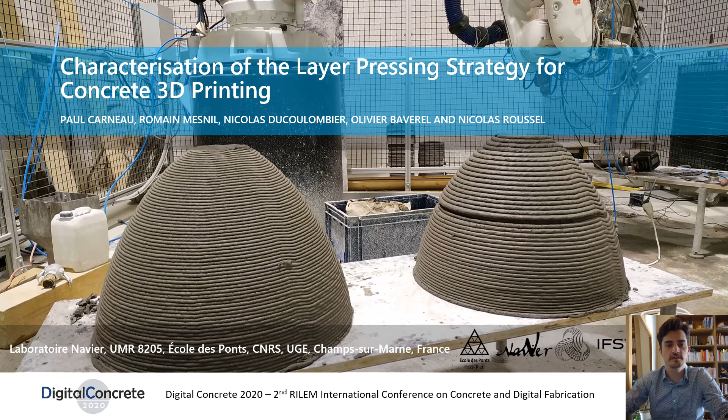I'm going to talk about the characterization of the layer pressing strategy for concrete 3D printing. This research is part of my PhD on concrete 3D printing of cantilevers and form finding of printable geometries in general, for which I'm supervised by Olivier Baverel, Nicolas Roussel and Romain Mesnil.

All the experiments are done in our 3D printing cell with a 6-axis robotic arm equipped with an extrusion head developed by XtreeE, and controlled with HAL robotic software, our industrial partners.

I started my PhD by comparing 3D printing and masonry structures in order to see if we can get insight on how to build cantilevers in additive manufacturing following ancestral masonry techniques.

One main result of this work was that to ensure a successful print, we have to look at the stability of the printed object at three different scales: the scale of the final structure, the scale of the temporary structure being printed, and a local scale corresponding to what's happening at the extrusion nozzle of a single layer.

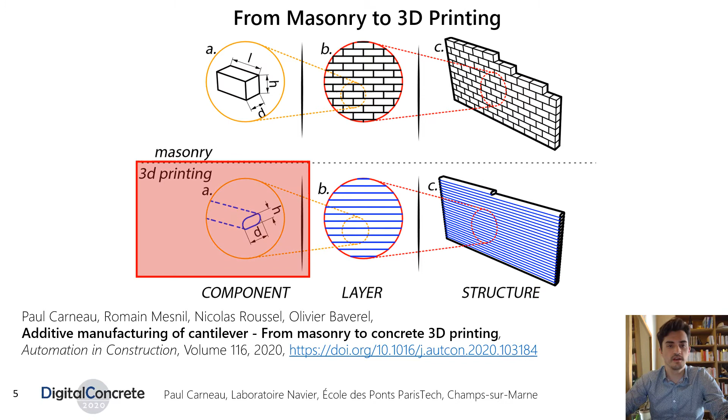This last scale is the subject of this presentation.

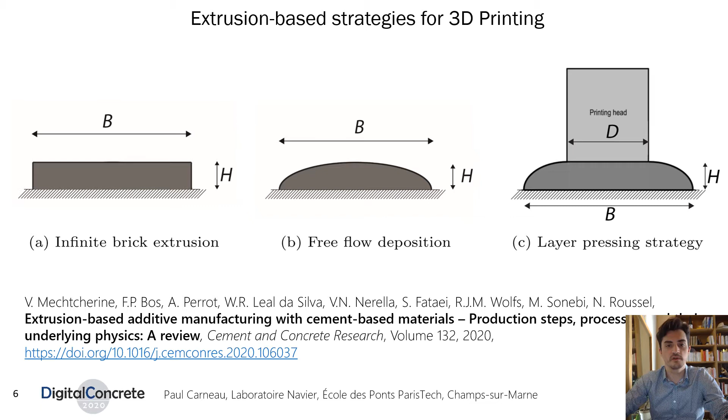Different extrusion-based strategies for additive manufacturing are used within the community today. We are interested here in the layer pressing strategy, illustrated on the right, where the extruded material has a low initial yield stress that allows us to shape the layer's cross-section on the go.

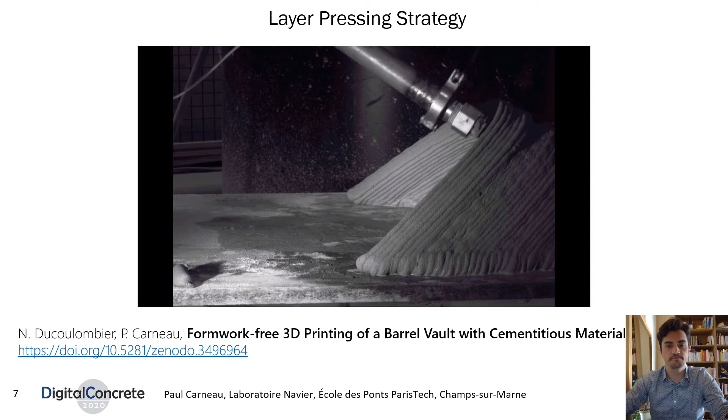We can indeed modify the geometry of the cross-section of the layer independently from the nozzle diameter and always keep a good control over the layer position. This allows us, for instance, to print with variable inclination, as you can see on this example of a barrel vault 3D printed without temporary supports.

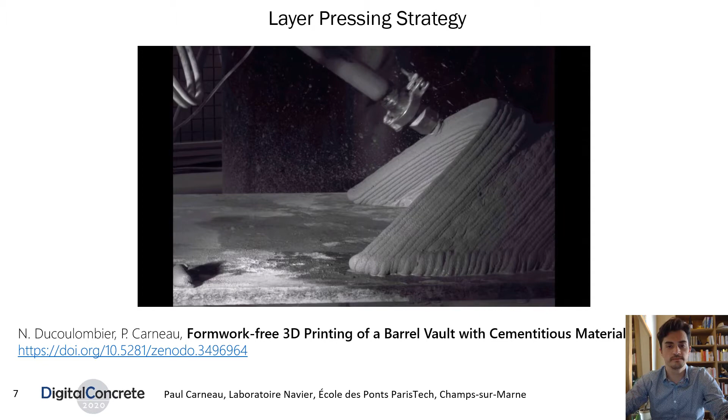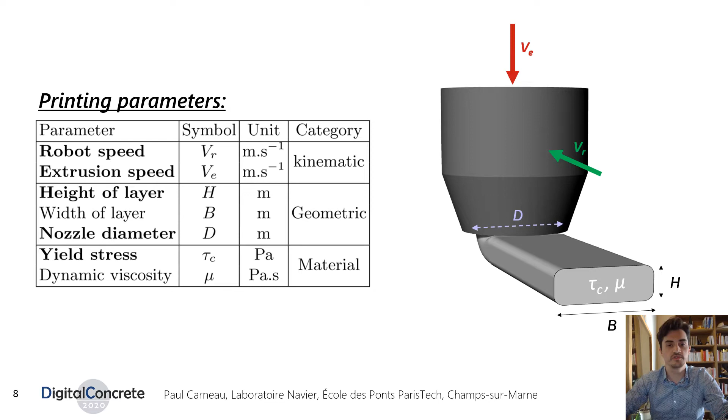So to start, let me introduce you to the printing parameters involved during the extrusion. We have the printing velocity VR, or the speed at which the nozzle is moving, the extrusion speed VE, at which the material is extruded, the nozzle diameter D, and the layer's cross-section geometry defined by its width B and thickness H.

Those parameters are related by the following expression of mass conservation. In the layer pressing strategy, H is given by the position of the nozzle, and the width B is a result of the imposed velocities. Whereas in the infinite brick extrusion, the layer geometry is directly given by the shape of the nozzle, and in the case of free flow deposition, the layer geometry is a result of the competition between gravity and the material yield stress.

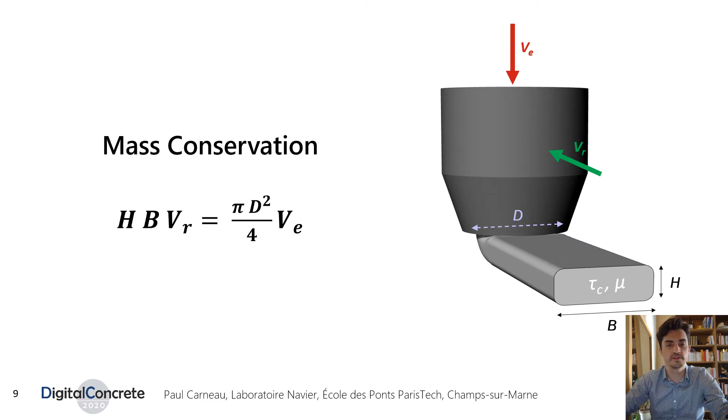With this relation in mind, we first performed a parametric study in order to understand the range of admissible parameters that we can use for the extrusion. We printed multiple square towers of 10 layers each, with variable thickness, printing speed, extrusion flow rate, and length of the object.

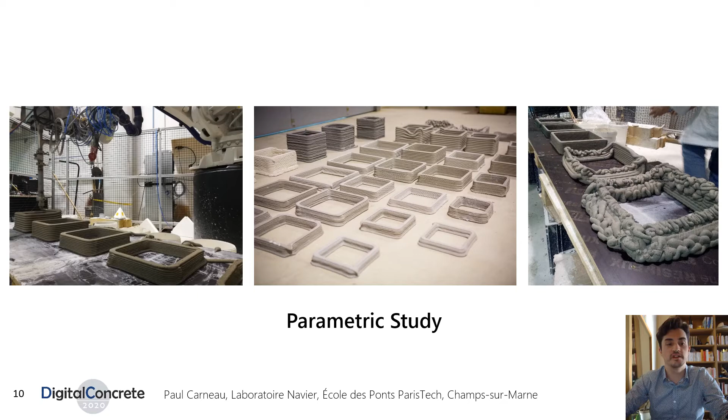That allowed us to identify different printing regimes. The first one is the ideal regime, where we have a perfect control over both the width B and the height H of all the layers.

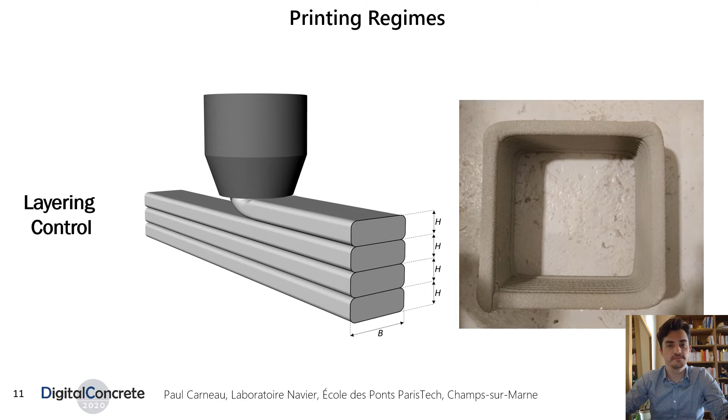For high printing velocities, we started to observe some longitudinal tearing of the layers. This failure mode can be related to the ratio between the printing velocity and the extrusion flow rate, which creates the longitudinal strains leading to the tearing. We identified this regime but haven't studied it in detail so far, and it is not in the scope of this presentation.

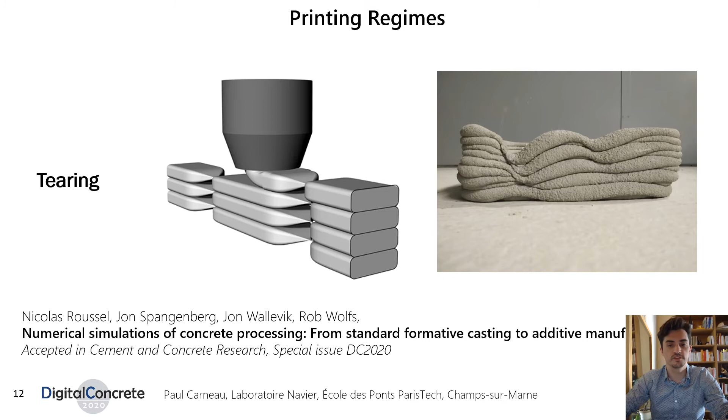The third regime is well known and corresponds to the case where the thickness of the layer is too high for the material to withstand its own weight. The layer flows on itself, leading to accumulated error on both height and width of the entire structure, leading eventually to its collapse.

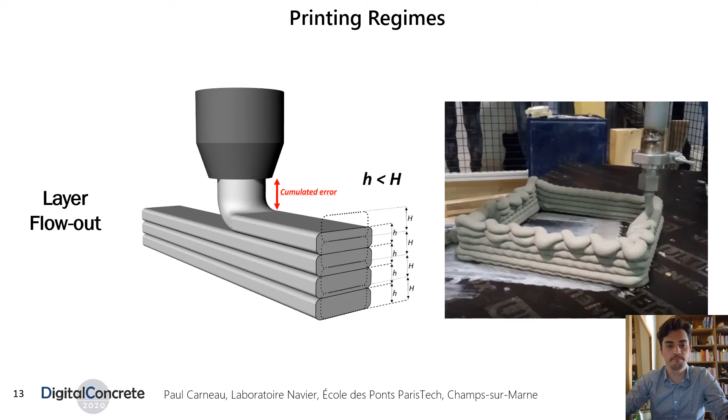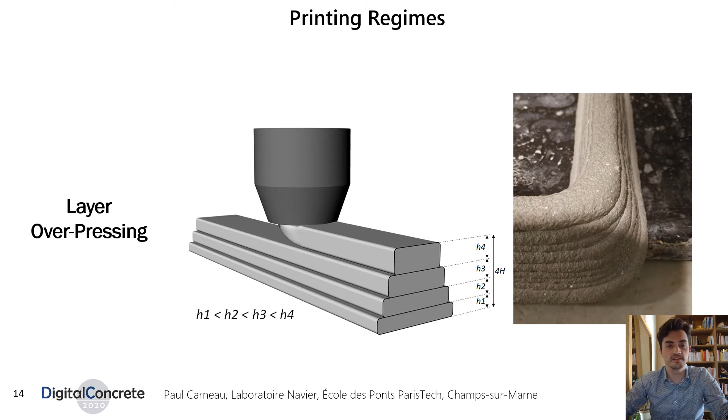Finally, the last regime, appearing for small layer thicknesses, corresponds to an overpressing of the sublayers by the extruded material. When a nozzle passes above all the layers, they are deformed, leading to this pyramidal cross-section. Note that the total height of the structure is still controlled, and this phenomenon doesn't automatically lead to a failure of the structures, as we can see on this example of a twisted tower, where the pressing phenomenon appears on the corners.

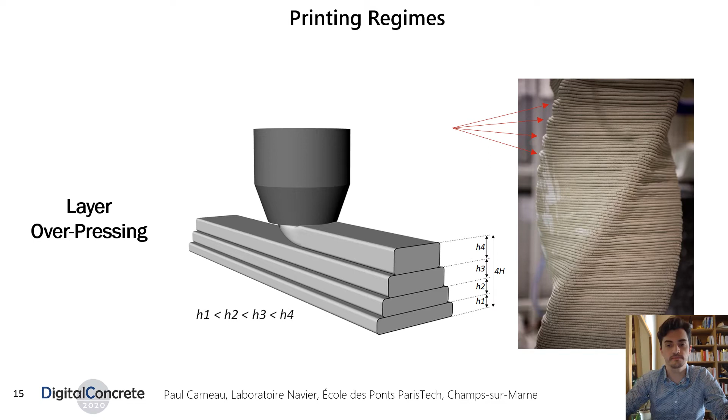Our goal in this research is thus to find the parameters range that ensure a pressing of the layer to keep good control over the layer thickness, but without overpressing them to avoid deformation of the sublayers.

So we first define an upper bound condition for the layer pressing strategy involving geometric and kinematic parameters. We introduce a characteristic time, Tc, corresponding to the time that the nozzle spans above a certain section of the extruded layer. Tc can be seen as the pressing duration.

We can relate it to a cylinder of material in the nozzle, whose length is given by this characteristic time and the flow rate. It results that the layer will be pressed if the height h is smaller than this characteristic length Lc. And we can rewrite this relation using printing parameters only to get our upper bound condition for pressing layers.

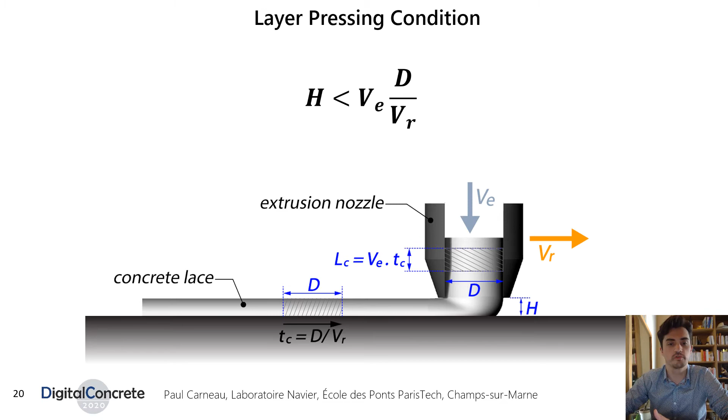Our second objective is to identify the force created when we are pressing layers. To do so, we developed an experimental protocol where layers of different thicknesses are extruded on a balance. We repeated the experience with different flow rates and initial yield stress of the material.

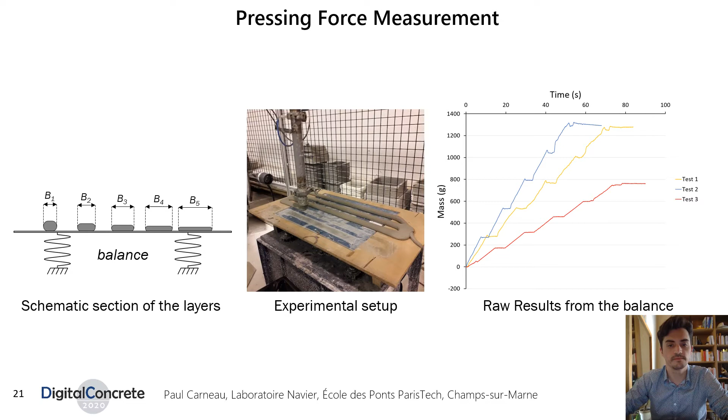After some post-processing, where we remove the weight of the material from the data, we can plot the force we are interested in function of the thickness of the layer. We observe the same tendency for all the different cases, where the force increases significantly when the layers get thinner.

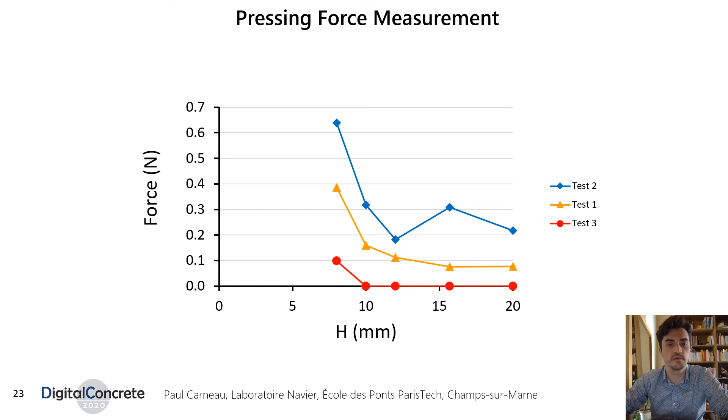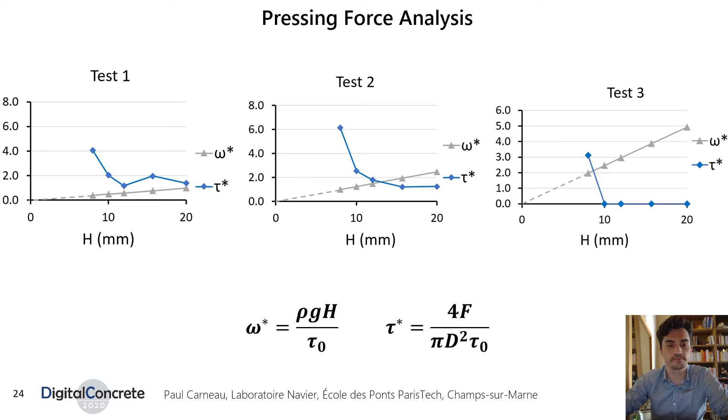To go further, we propose an analytical solution for this force depending on the printing parameters and the material properties. We started from a known relation giving the force necessary to deform a longitudinal layer of length L and yield stress τ0.

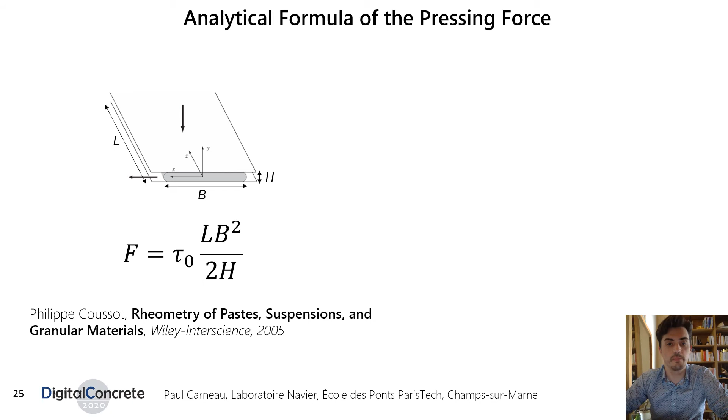And we apply the same relation to the case of a 3D printing process, simply by recalculating an equivalent length, L equivalent, in function of the printing parameters VR and VE, giving us our new relation for the force in the case of 3D printing.

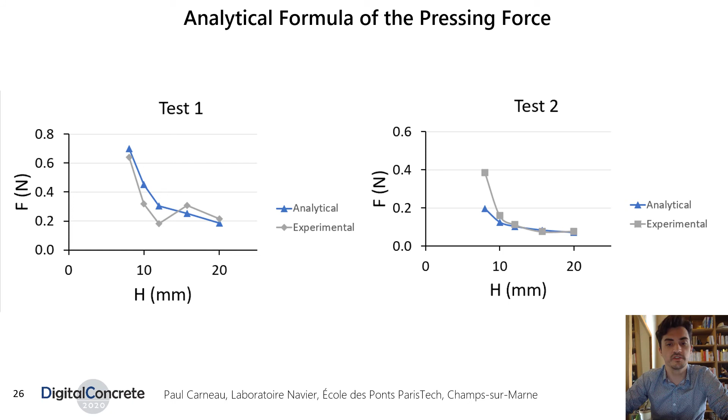And we can see a good fit of this analytical relation with the experimental results, with some discrepancies when the layers get thinner and the force higher.

From this, our final objective is to map the different printing regimes observed in function of the printing parameters. We still need to define the lower bound for pressing layer by writing a stability condition on the layer N-1, the first sublayer.

We can calculate this layer's yield stress at the time that the new one is printed above it by this relation where we introduce the structuration rate A thix,

and we can write the condition that prevents deformation of this layer N-1 by stating that the material resistance must be higher than the stress coming from the weight of the layers and the additional pressing force that we have identified before.

We finally have our lower bound condition on layer N-1 given by this relation, and we can see that this is expressed by the same parameters that are involved, the parameters that define layer N.